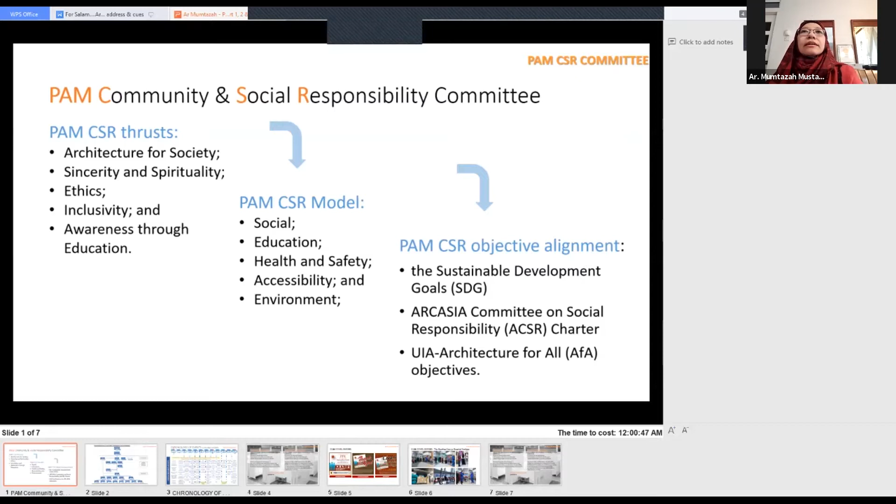So we actually studied, evaluated, researched, analyzed, and prepared reports of potential designs and buildings while receiving feedback from local and international organizations and communities. Next slide, please. We have designers who proposed designs of quarantine centers to the government, all within the first week of MCO. Next slide, please. This was last week's slide. So next one. Last week, as Architect Mustapha mentioned, we had 3 designers present their ideas, and we even had 1 volunteer architect who was called by the government and actually participated in the setting up of a quarantine center in Sabah. Today we're going to have 3 more presenting their ideas. And also to answer last week's many questions, we have an engineer here too.

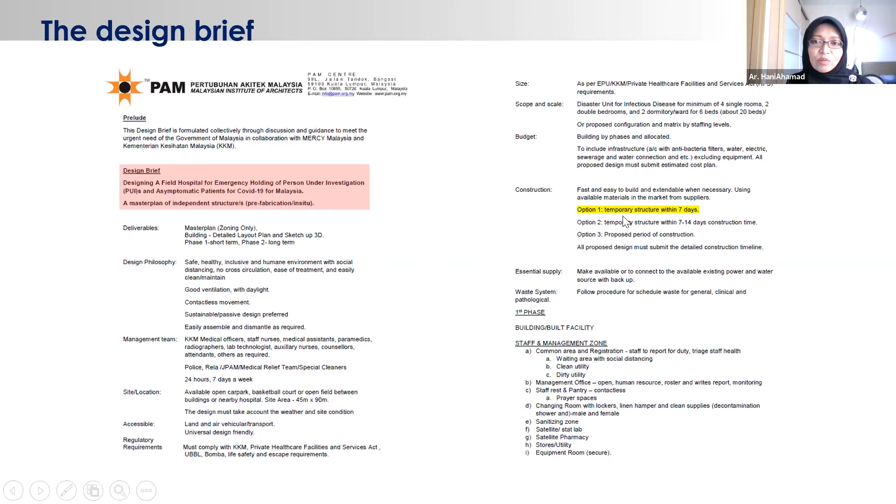So this exercise for the quarantine center is a joint venture between Mediconsult, PAM, Mercy, and several other architects as well. So this is my turn this week to explain our proposal. We received the design brief from PAM, which called for a field hospital as an emergency holding to house the person under investigation or PUI and asymptomatic patients for COVID-19. We actually selected option 1, which is to construct a temporary structure within 7 days.

We made our assumptions. We are looking into the patient profile in our design, which should be able to house only confirmed positive COVID-19 patients who have no symptoms or mild symptoms. There should be no pre-existing illness. There should be low risk as well. So that is on the patient side. And then in terms of design criteria, because we're looking into fast construction, it should be modular, scalable, easy to construct, and also functional at the same time.

At that point of time, when the proposal was asked, the government hospitals were still able to cater to COVID-19 positive patients. So this exercise is actually looking at the so-called emergency scenario in case there's a sudden surge in positive cases where the government hospital will not be able to cope any longer. So that's why we came up with the proposal, just in case there's a need to build the quarantine center or field hospital, so that this quarantine center can isolate those with, like I said before, mild symptoms. Then the hospital can concentrate and give treatment to more severe cases.

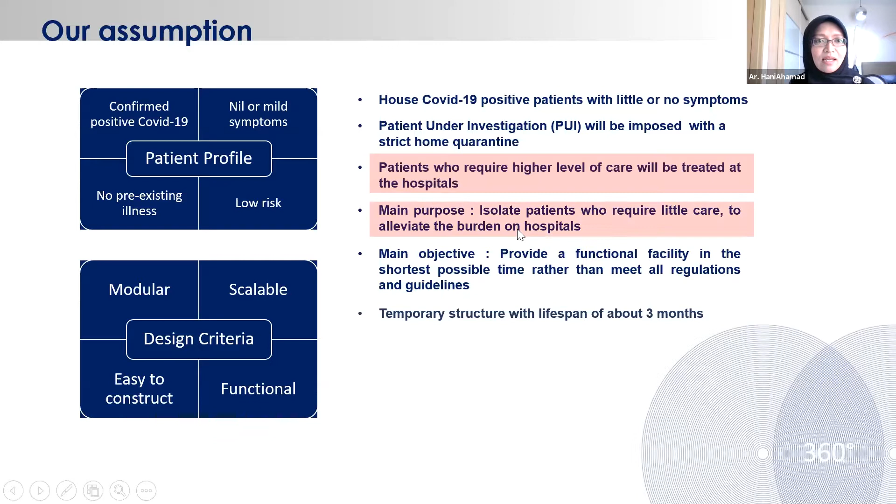Okay, we did a bit of research from the internet. Like isolation, there's a proper segregation between the staff, patient, dirty and clean. The same goes for this field hospital, just on a larger scale. We provide a proper transit or transfer zone. This is where most of the health screening will be conducted before the patient is actually sent into the patient zone. And then there's also dedicated staff quarters and a management zone as well.

We are not even actually addressing the PAM need statement, because we know that this quarantine center is supposed to be a support center to the government hospital. We are looking at just mild symptoms, but they are positive. So for our segregation of the space, we are looking at having a proper entry and exit, so that all patients and staff are properly screened upon entry.

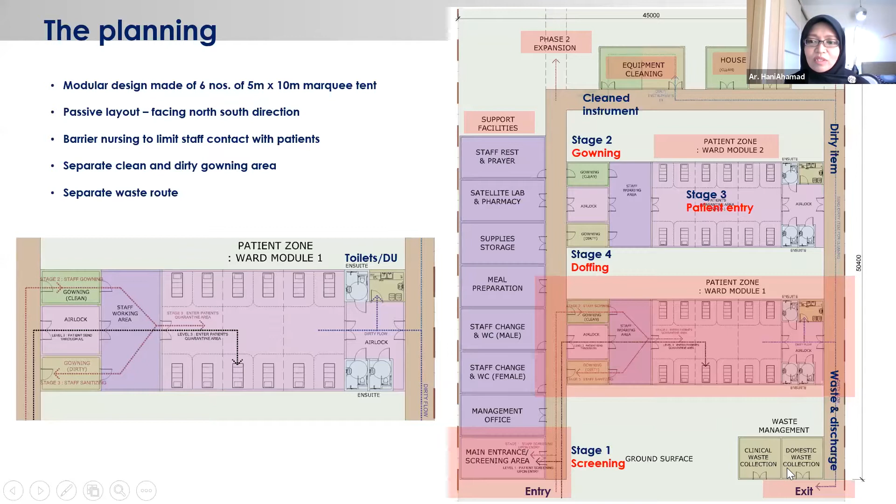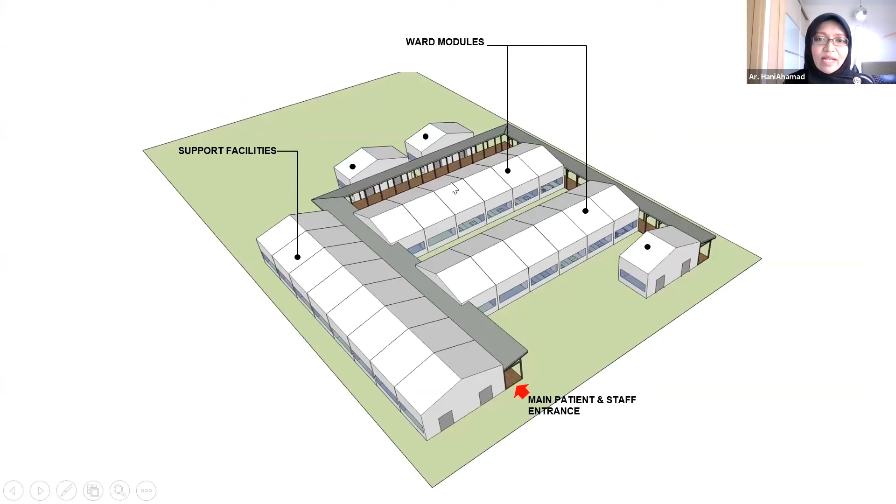So this is the massing, where you can see the main patient and staff entrance. There's the support facilities, the ward modules. You see, in this case, we only provide 2. And then equipment cleaning, housekeeping, and also the waste management and the waste collection near that.

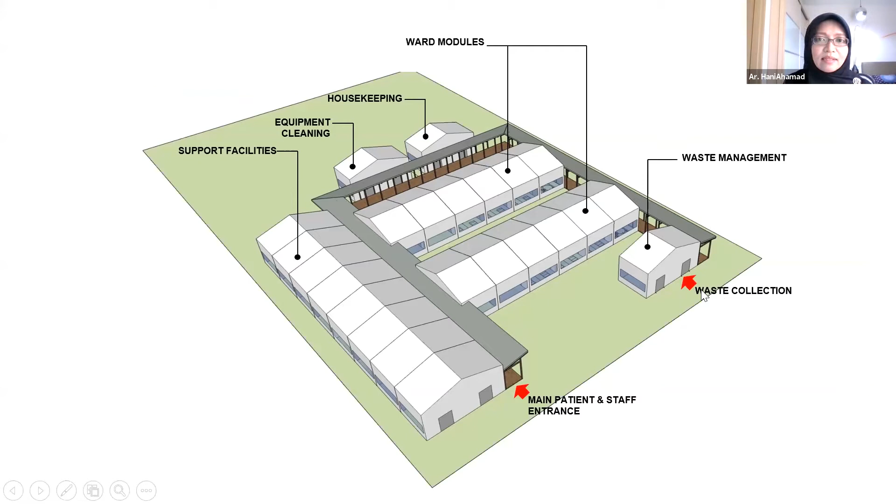Okay, immediately after that exercise, I noticed that WHO has introduced an online course related to COVID-19 issues. So they introduced this severe acute respiratory infection treatment facility design in several languages. So it's not just limited to English. There are other languages as well, if not mistaken, like Mandarin, Spanish, Russian.

So everyone who is interested to know in detail how we are supposed to design this treatment center, you can just go online. And then after you complete these 3 modules, you would receive the confirmation of participation, like what I did on the 4th of April. So you can just go to openwho.org.

And then immediately after attending that course, I was tasked to look into retrofitting of the Stadium Negeri Kuala Terengganu. Unlike Ar. Chan, who managed to design and build one, I think I am more fortunate because I just designed it, but because things are still within control by MOH and our government hospital, there is no need to retrofit this stadium. The site is located in front of the COVID-19 admitting hospital, which is Kuala Terengganu Hospital.

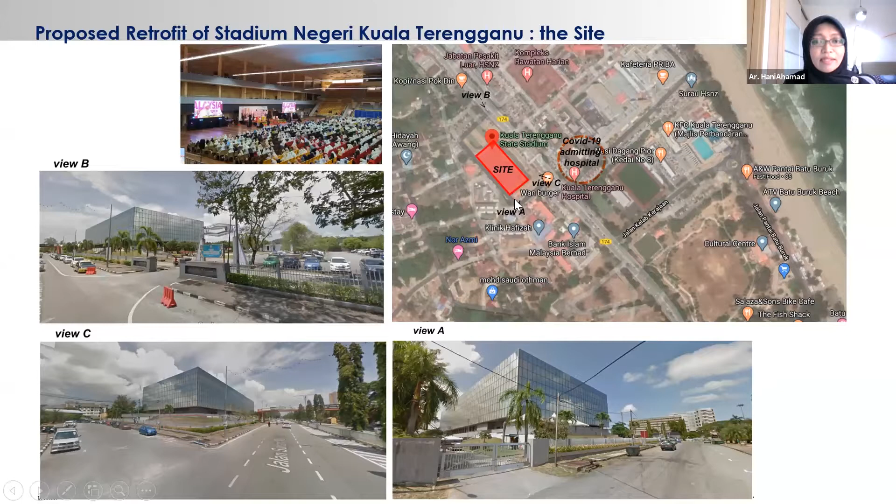Okay, this is my proposal. Just like what I mentioned before, a field hospital is an open space, so it's quite easy for you to arrange things in modules and in sequence. But doing the retrofit, you need to look into the existing space allocation, and how we are actually able to handle the ventilation issue at the same time.

So if you look into the planning, on the right side, the anjung is the main entrance to the stadium. It's slightly elevated, which is good as well, because this is where it's easy for you to control the entry. For this anjung, my approach is that I allow only the patient entry from this side, and also the clean linen delivery and the drug delivery. Staff and logistics will go through another entrance.

So that it's easy for the hospital staff, I presume, who should be stationed here to look after the patients. So upon entry, you can find a waiting area for the patients while waiting to be triaged and to have samples taken. Then before admission, they will go through the airlock.

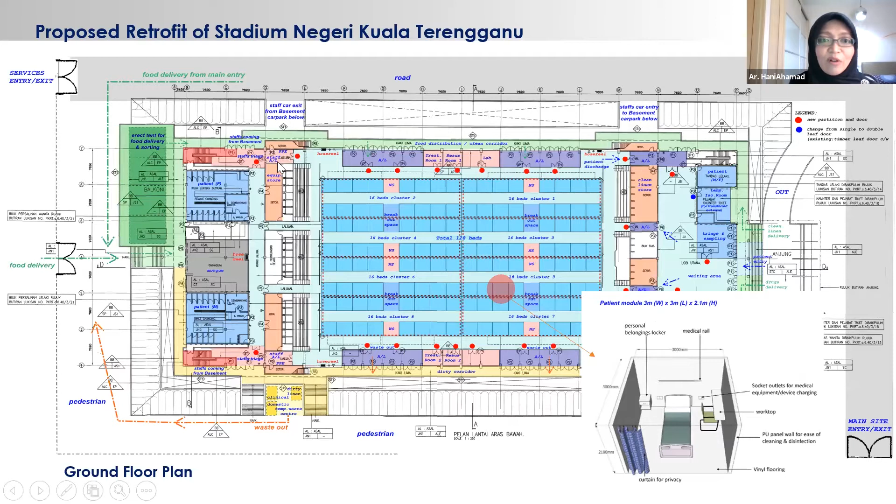This is the ground floor that I mentioned just now. If the stadium is retrofitted, the staff can park their cars, and the entry comes from the basement. They will go through these 3 staircases, walking up, and then they would reach this particular staircase, and there's a proper airlock, proper gowning and doffing area before they enter the patient treatment space.

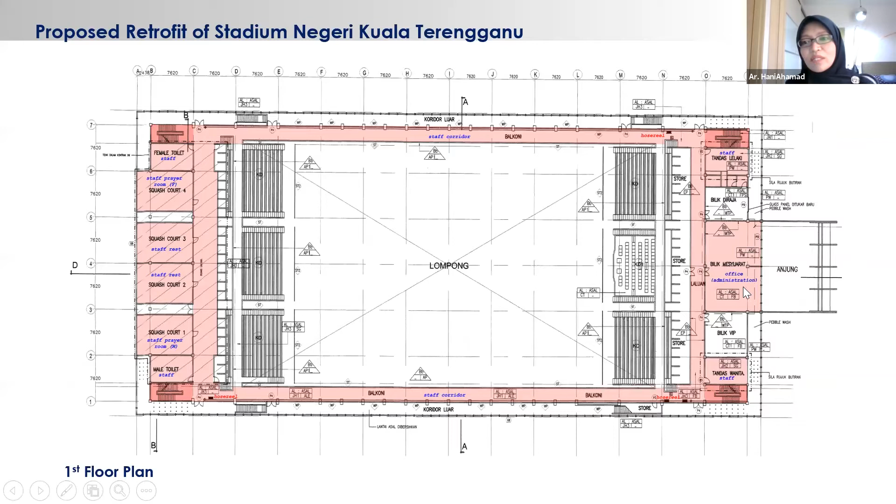At the same time, on the first floor, they have to use the internal staircase. They would go up to the squash court area that I proposed to be their staff rest and staff prayer area. There's also a male toilet, a female toilet, and a big meeting room, which can be transformed into the office administration as well. I think that's about it.

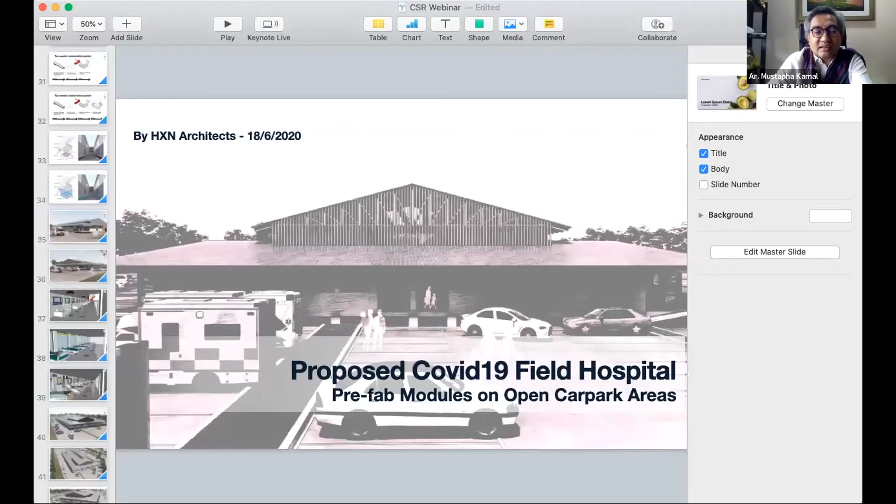Okay, Bismillah. Hold on, I need to time myself, yeah? Not more than 10 minutes. Okay, Bismillah, Assalamualaikum. Can you hear me? Okay, all right.

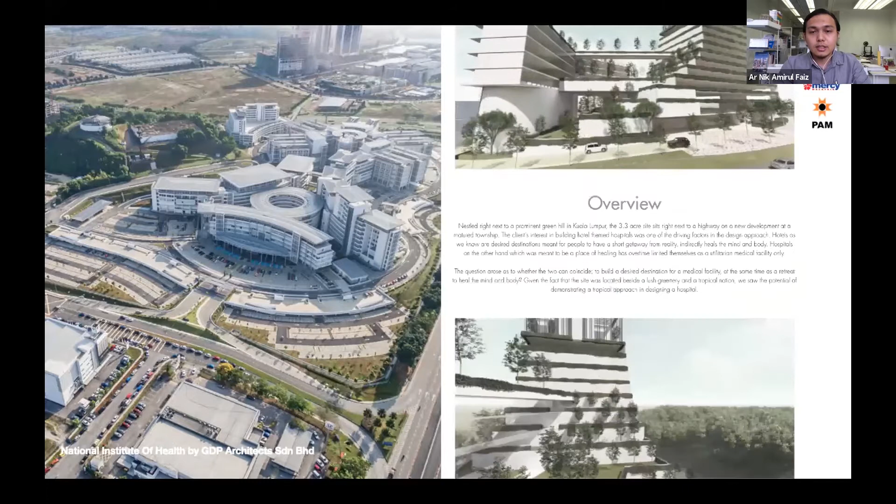We are a young firm, very eager and determined. We like to challenge conventions, with experience in commercial, residential and mixed development projects. A bit of background: my partner had direct experience in a health training facility project during his employment period. And we recently did a private hospital proposal at the end of last year.

So, jumping straight into the proposal, when we first received the brief on Sunday evening, we were told to come up with a proposal the next morning. It was a very unique circumstance. If we imagine an architect given a brief to design as running an 800-meter track, this was purely a 100-meter dash. There was no time to pause or relax, straight onto the drawing board. Regardless, we took time to digest the brief and straight away worked on a proposed solution.

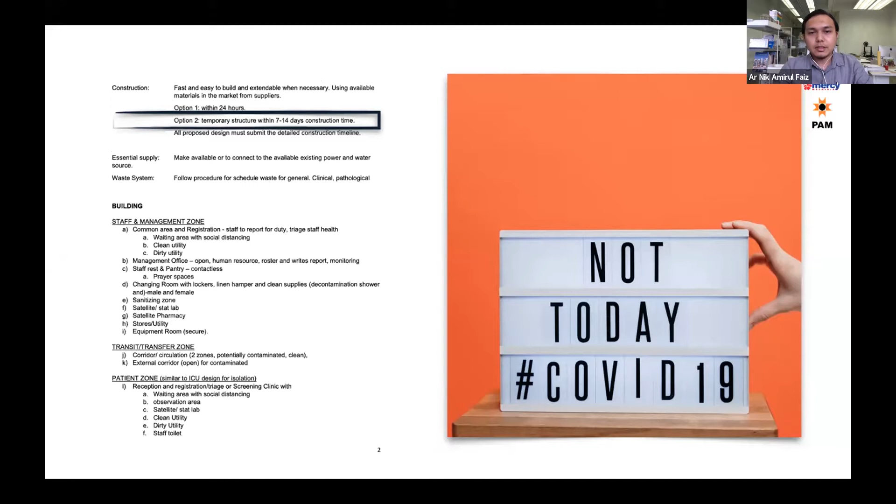We were given two options: one being within 24 hours, the other a 7 to 14 days construction period. We opted for the latter. The program and parameters were given, and the following was the outcome. Our first response was on the site selection. At that moment, the government hadn't announced the gazetted sites meant for the quarantine centers yet.

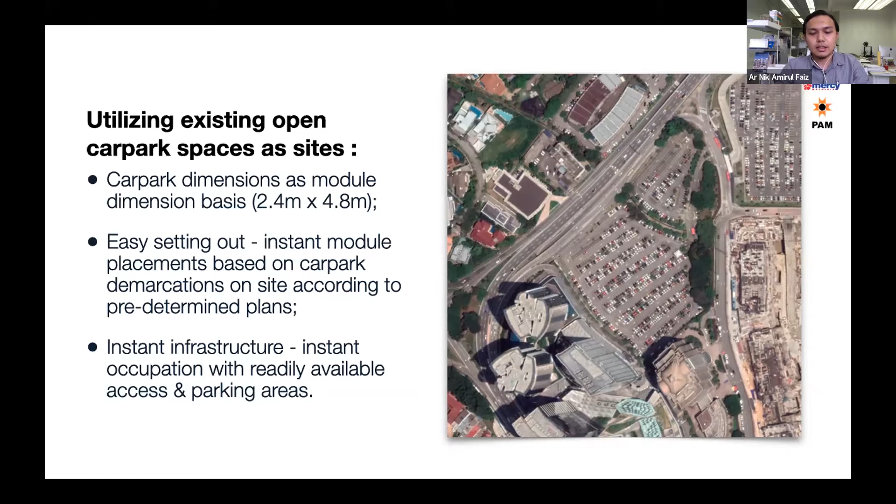So our response, therefore, was to occupy and build on the open car park areas. Very simple reason being that we wanted to use the car park as basis for modules for our designs, right? And easy setting out. So imagine if a team were to come and set up the hospital or the field hospital, it will be done instantly and very quickly, and also instant infrastructure, instant occupation with readily available access and parking areas.

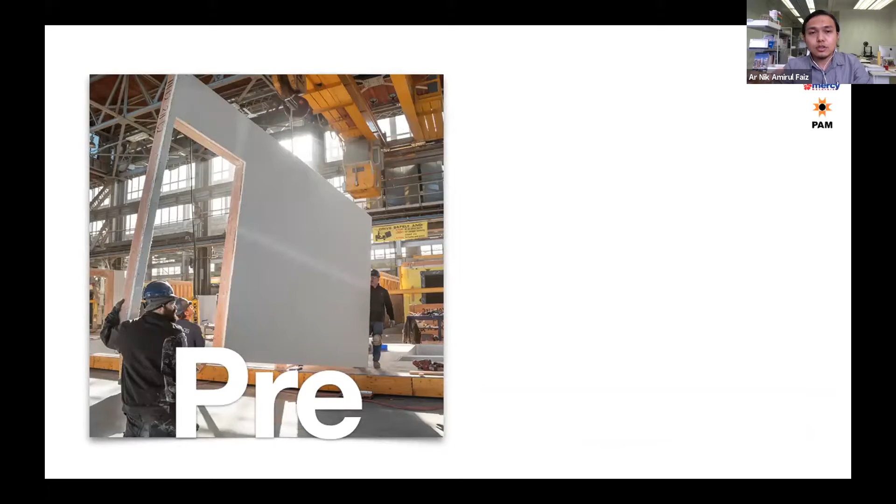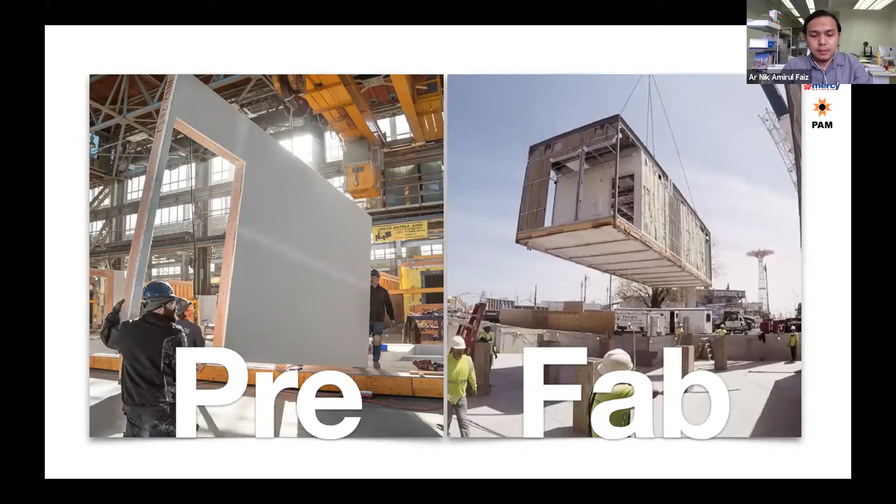So using the car park dimensions as our design basis, the next item was on our chosen method of construction. So nothing pretentious. We straight away adopted the prefabricated approach, right? So using the car park as module, we immediately use as basis for our design. So the prefabricated structures, adopting the block concept, prefabricated off-site and delivered on-site and assembled on-site as well.

So steel gypsum boards, GI windows, very simple steel framing, complete with gypsum floors and walls with windows ready. And then the concept is to raise the whole structure on precast concrete stumps for easy placements as well as services installation. And then a simple double deck roof so that we achieve insulation, external protection, as well as finishes all at once.

Okay. So a few days into the MCO, this movie went viral, as you all know. So me personally, I was very fortunate to watch it, I think the first few days. And the good thing is it gave us a very brief understanding of what we are facing at the moment. So it's like everything happened like clockwork, you know. Oh, this is happening. Oh, this was in the movie, blah, blah, blah.

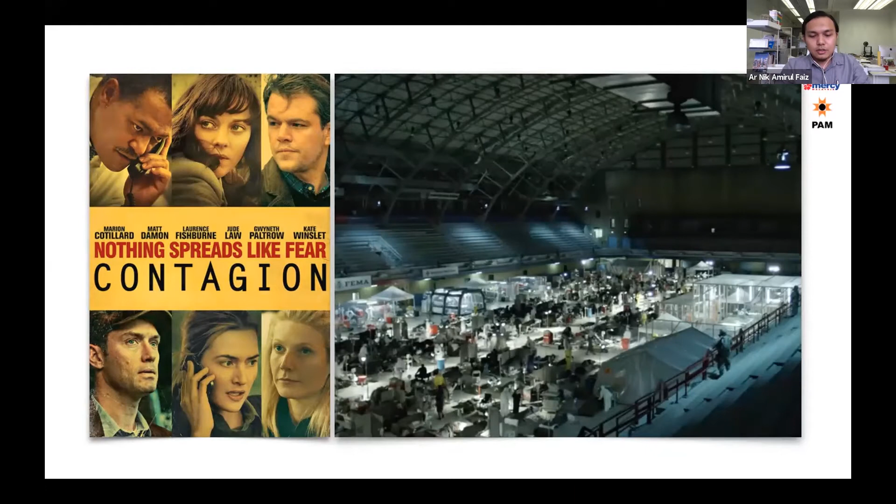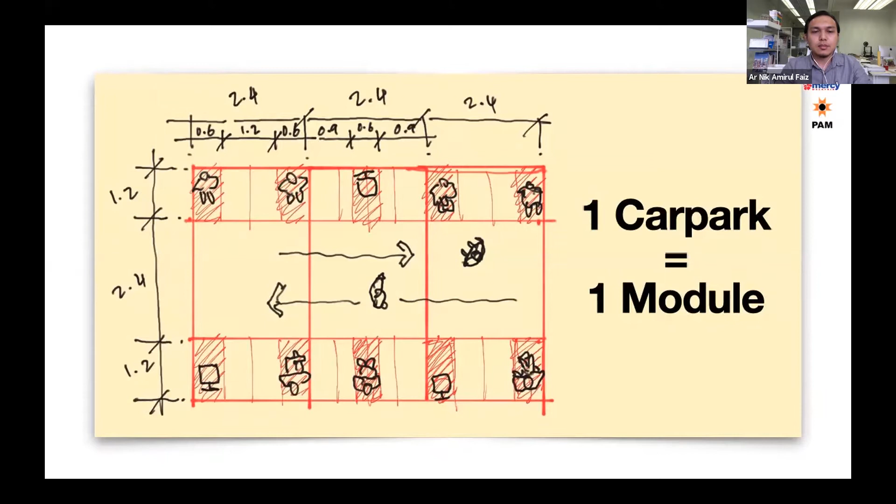All right. So that was our inspiration, and we actually took lessons from there, and we straight away wanted to focus on two issues, which was mainly containment as well as our new norm, social distancing. So after all the research was done, we straight away went to the drawing board. So our focus was to have a clear layering of spaces. So taking the car park as module, as you can see from the sketch, this was our main basis on social distancing approach towards the layout, at the same time in shaping the rooms and spaces onwards.

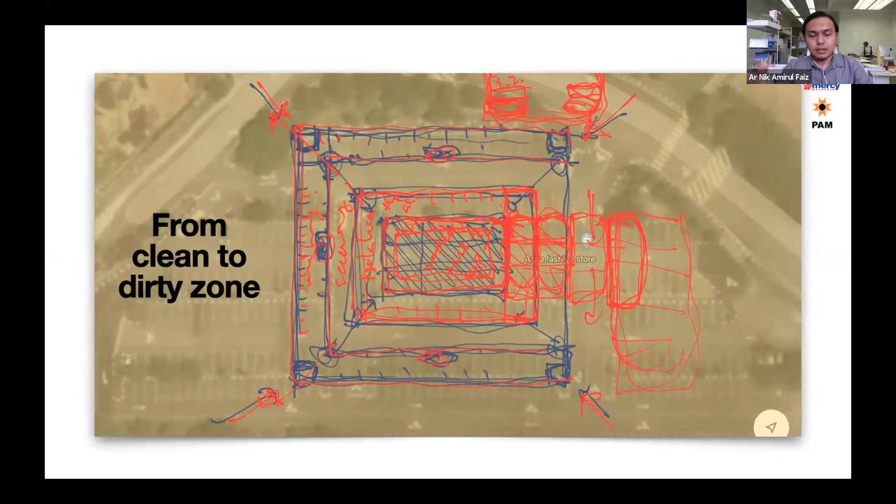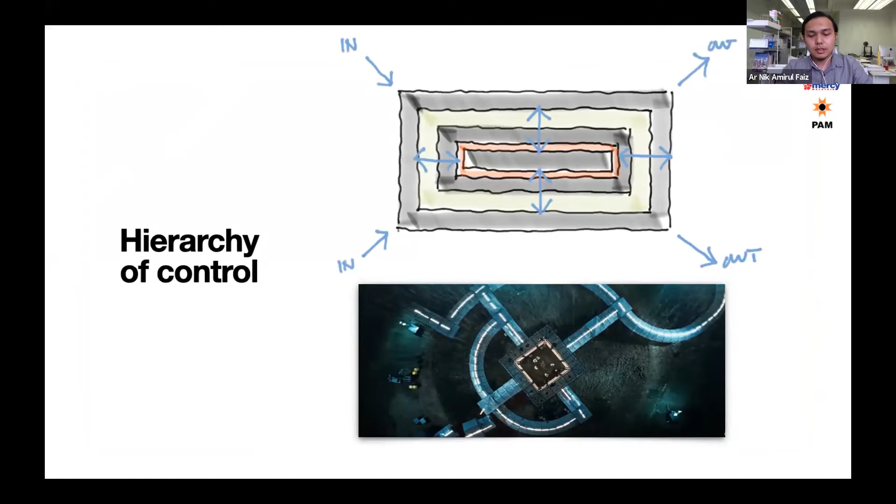So our focus was to have a clear layering of spaces between clean area moving to the dirty zone, all right? Also known as the containment area. So another important factor was the hierarchy of control, because you need to have screening and transferring from the clean to the dirty areas. All right. So also not forgetting the visual connectivity and wayfinding. So we introduced courtyards between the clean and dirty zone so that people will know and can navigate easily.

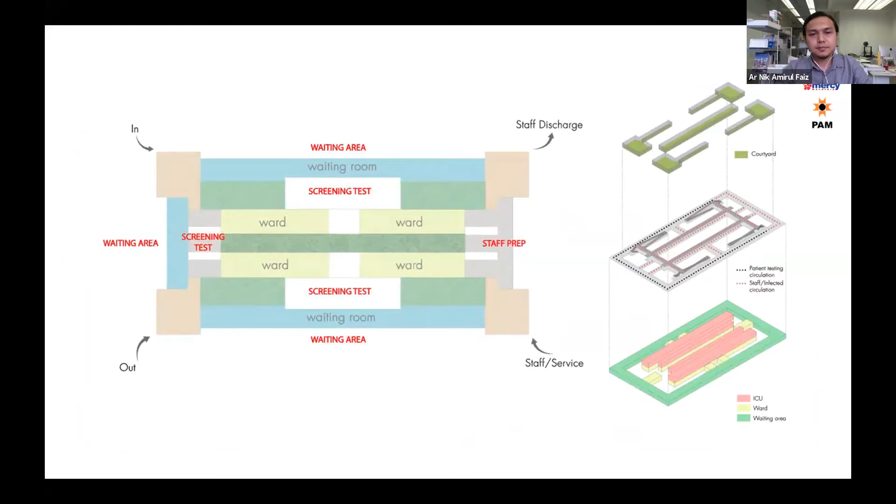So this is the outcome of our program, the diagrammatic approach. It's more like a pyramid concept moving from outwards inwards. So a brief walkthrough through the building. A public who comes, they will enter from each of the end corners there. And then they will move into the waiting zone. So waiting zone is designed such that it allows social distancing. So you need a very big space for that.

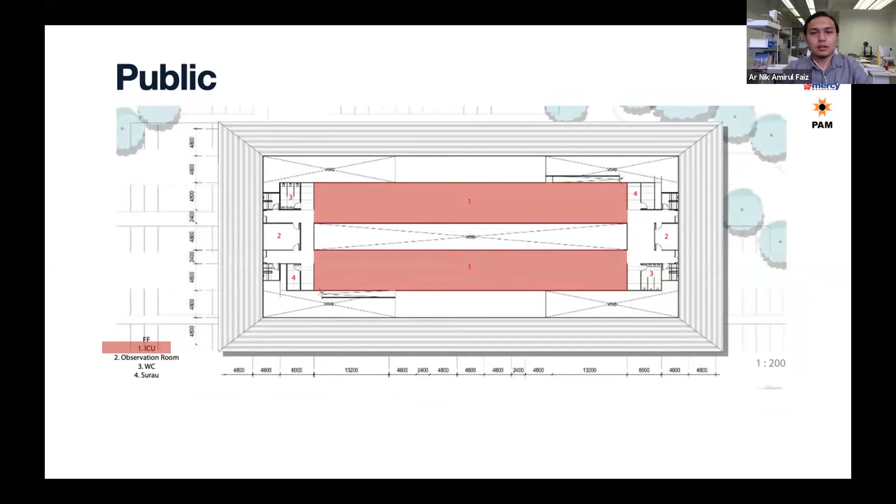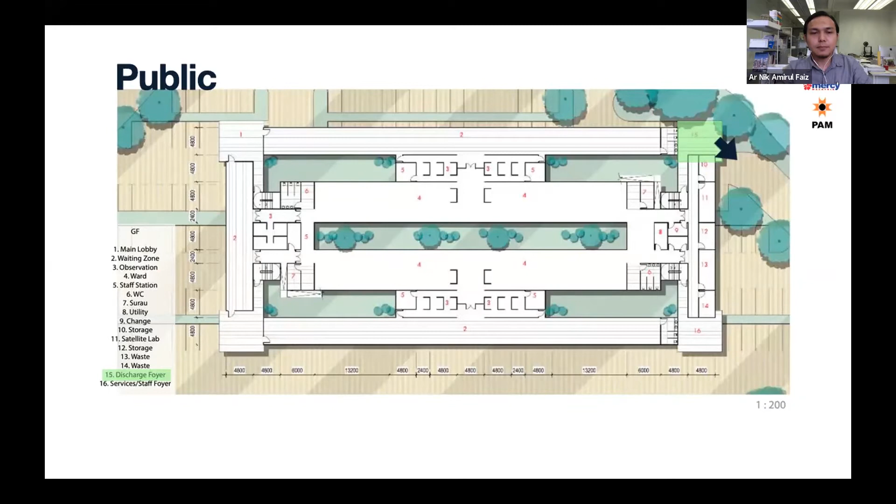Then they will move on to the screening area. So this is where all the airlocks and isolation spaces are placed. So those who are tested positive, they will move in to the central area, which is the contained area, the wards. And we also have allowed for possible ICU wards up on the upper level above. So if after one is already treated and they are able to be discharged, they will exit through that corner there. And this corner is meant for frontliners to enter and exit the premise, as well as ambulance drop-off area for positive patients.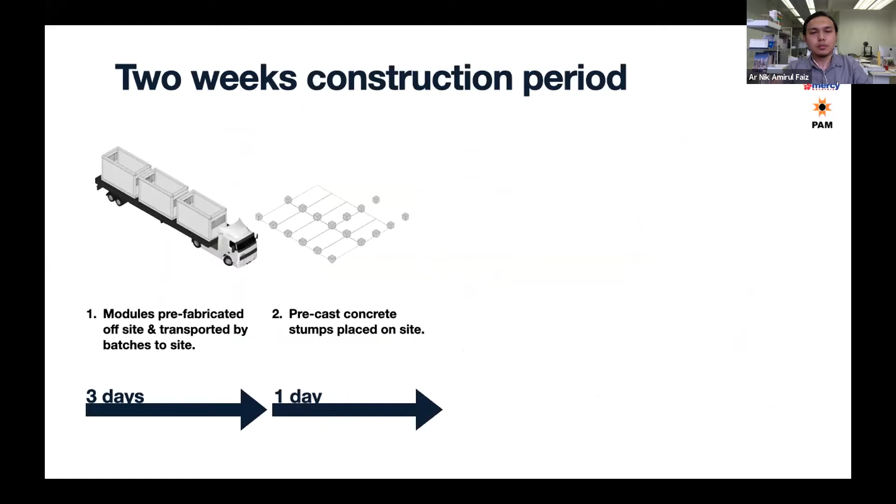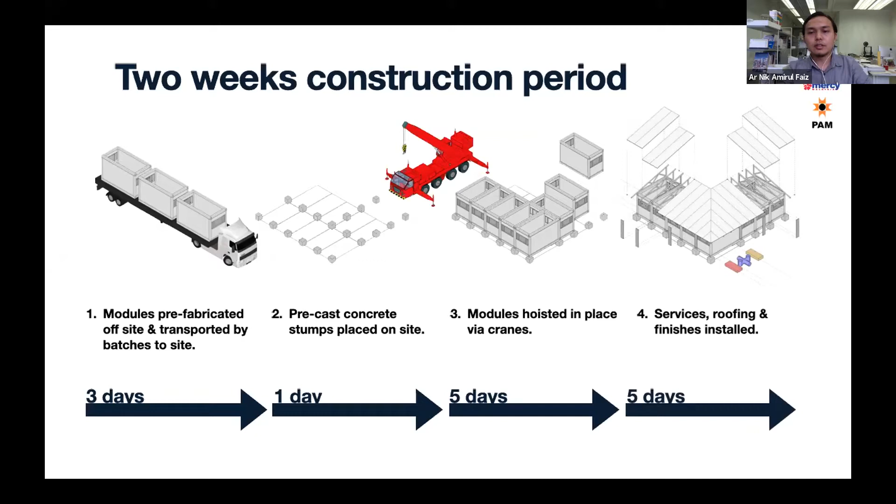Okay. So just the idea is that everything is constructed within the 2 weeks. So you have 3 days probably to fabricate it off-site. And then as it goes along, the concrete stumps can be placed on site, with the car park being as a setting out reference. And then modules are hoisted in place by cranes. That would take about 5 days, yeah. And then lastly, the services, roofing and finishes all installed. So this was our estimate. Of course, there's an overlapping of sequence.

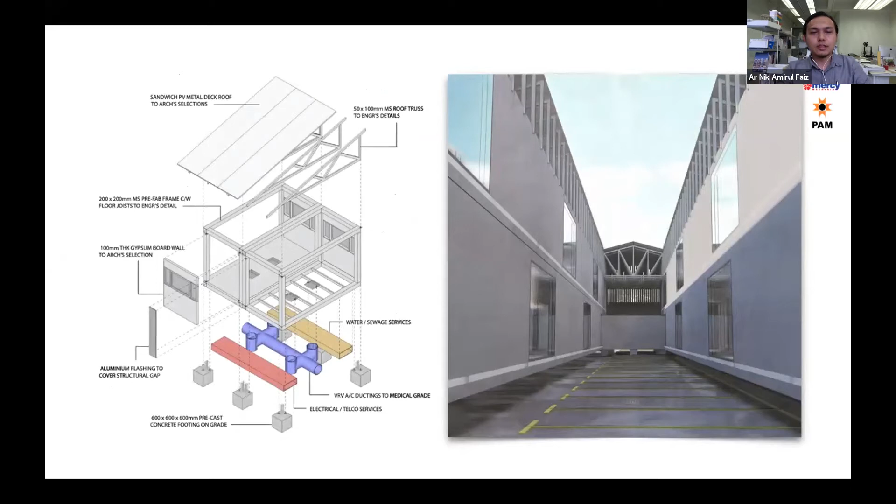This is a diagram to show our basic component that we felt was very important. So to raise it up, it allows for all the M&E services to flow underneath, all right?

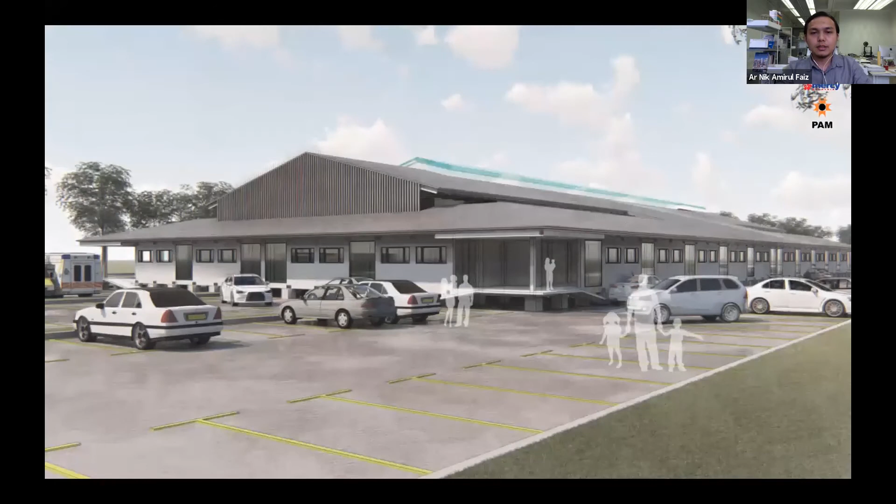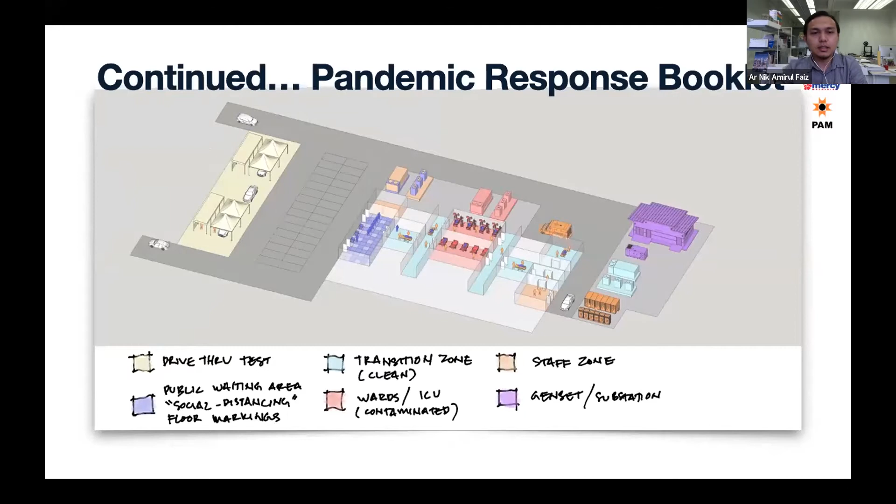So after this exercise, a group was created and we had a lot of discussion on board. I mooted the idea of having a booklet, some sort of a diagram document for possible pandemic responses in the future. So based on this COVID-19 experience, we documented the idea on the basis that we are occupying an existing facility. So you have to have the outdoor testing area, and then a little more diagram description of how the waiting area can use social distancing as a guide for layout planning.

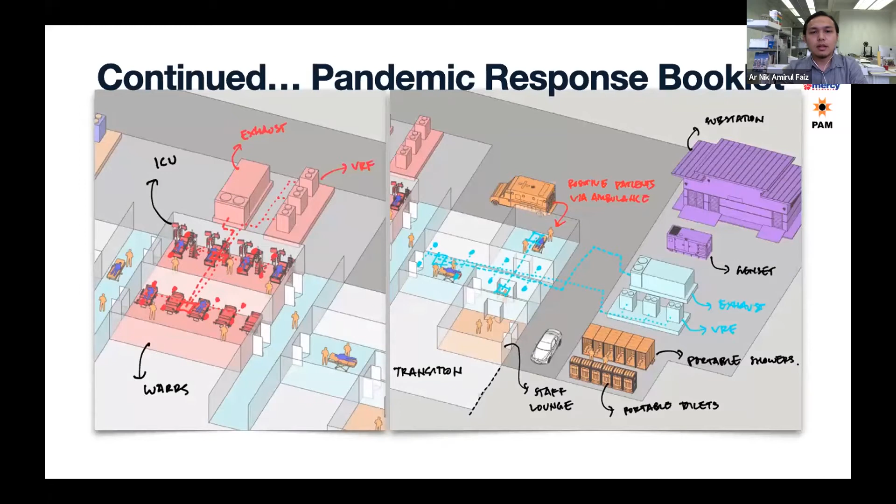And most importantly, all the M&E requirements need to be bite-sized, so that you can actually mobilize and occupy the premise instantly. And then some more diagrams showing how it will work.

Sorry, I just unmute. Thank you, Architect Mus. Hello, everybody. I hope you have enjoyed the first two speakers. Mine will be very, very brief.

So anyway, we did a very, very quick study, although it was like quite impossible digesting the design brief. There's so many things to do, zoning and all that. But this is our design philosophy. We understood all these words are so important, to have a clean zone and to stay healthy, and having the ventilation and daylight. And as Architect Nik mentioned, the social distancing is important.

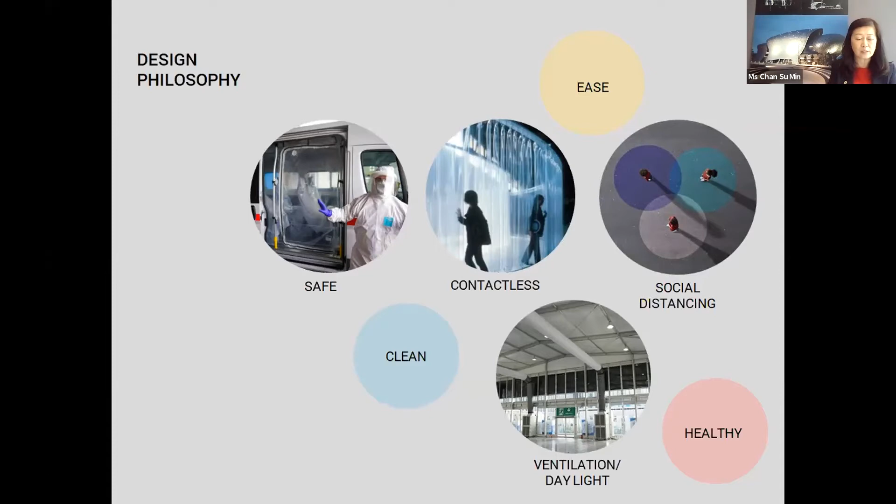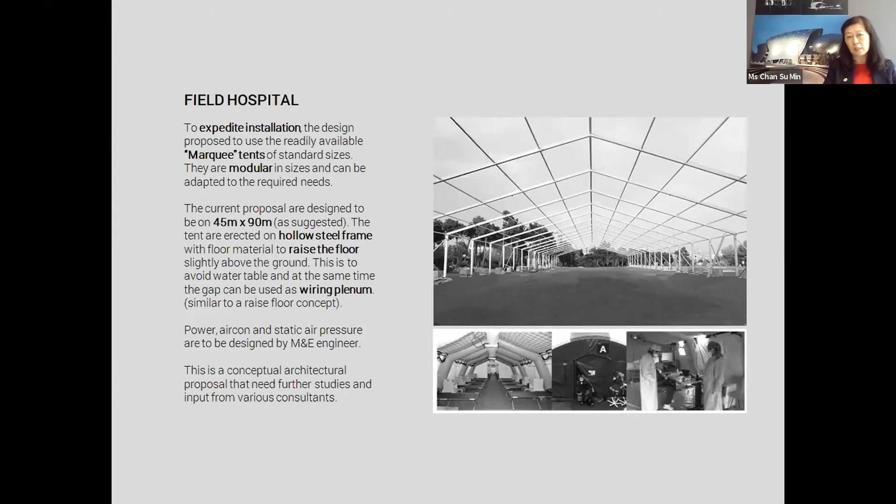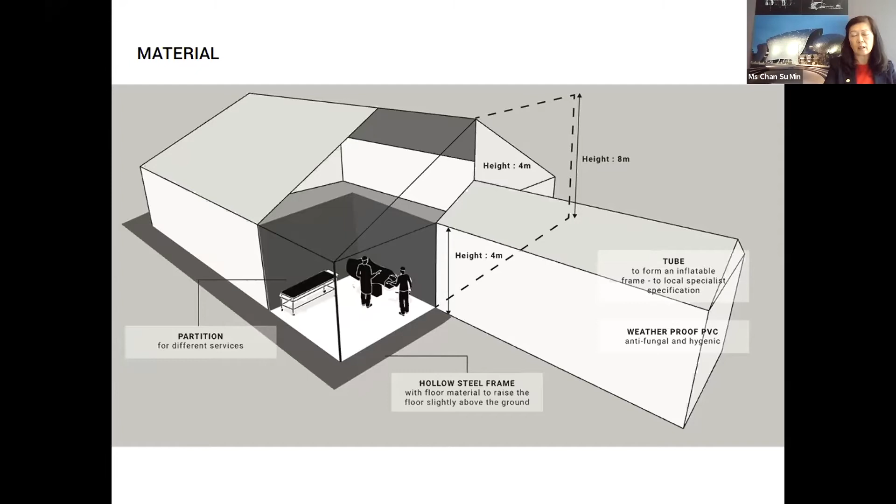So what we did was we chose a modular system, a little bit like a marquee that you can set up very quickly. This would be laid out on a site which is given to us, 45 meters by 90 meters. Our frame span would be 15 meters and it goes on every 6 to 7 meters. So the main thing we used was a hollow steel frame. Once we set that up, it could be laid with waterproof covering and providing transparent panels for daylight. Of course, in a tent like this, it will be a closed tent, so ventilation and aircon is much needed. We also proposed a raised floor, and this is where all the M&E will go through.

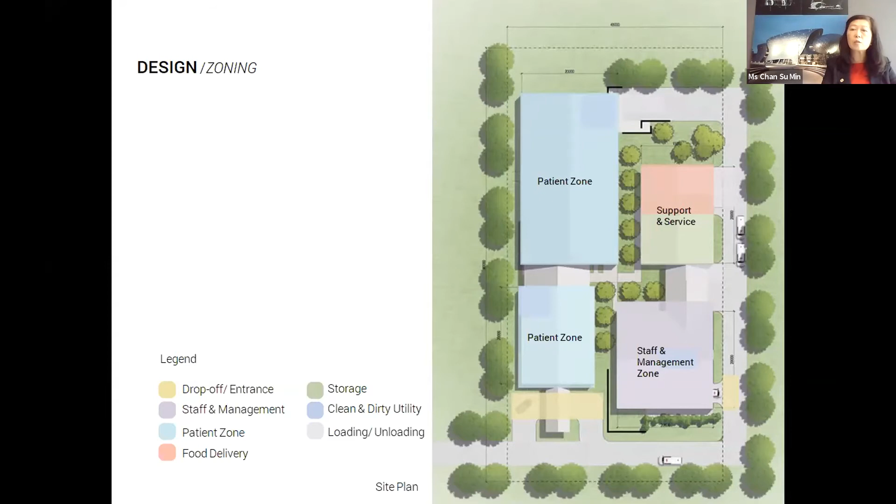So we went on to understand that this pop-up field hospital could happen in places like the open car park, the open field, basketball courts, and also in between buildings. So modules are very important. We studied the zoning, and this is more for patients who are already tested positive, hence this is like an isolation ward, a quarantine ward. So patients will arrive and go through their screening, lab tests, and if it is definitely positive, they will go into the ward itself. Of course, supporting sectors are needed: the staff and management zone, which is in a separate marquee, and also the supporting supplies, medical supplies, storage, and whatnot.

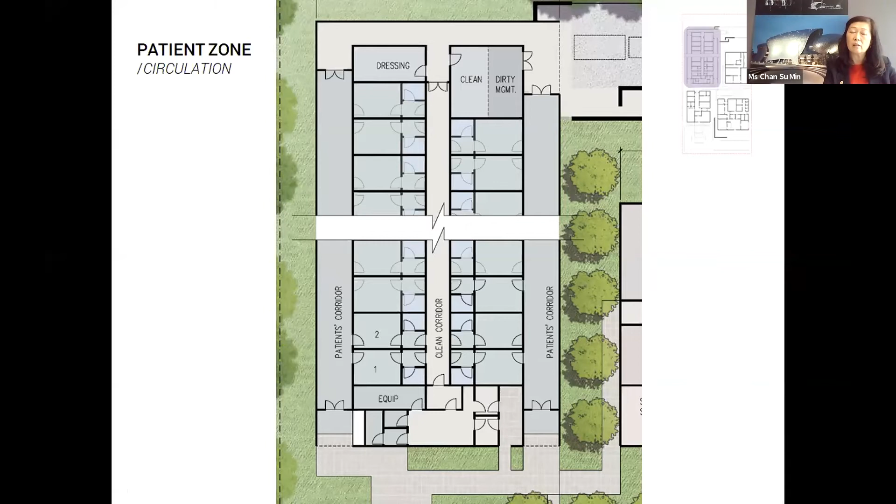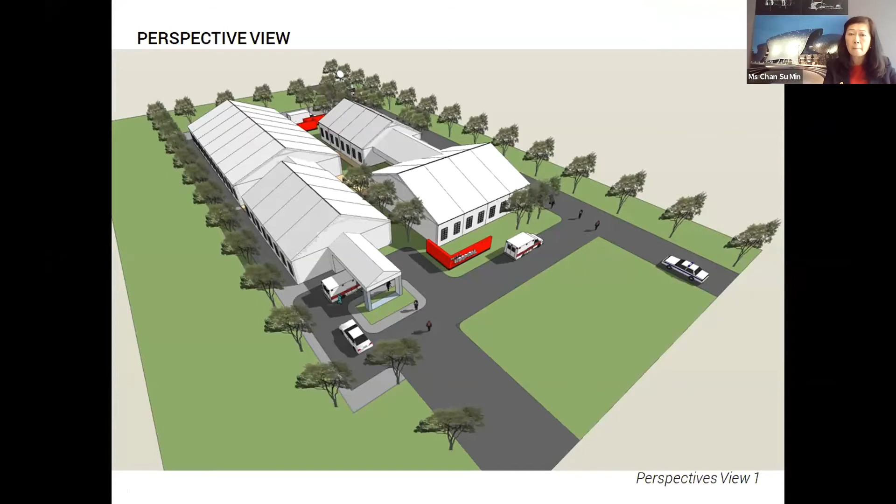And the inevitable also comes out from this, that some patients do not make it. We have an area at the back where the body can be disposed without coming to the front. Ideally, we hope that this will happen in all the sites that are given.

Now, I would like to share with you, while we went through the MCO, and this was only the first Sunday in the MCO, and news around the world wasn't good. I think you've all heard about the scary figures in Italy and Spain that went up. And I think our chat group was thinking on a bigger scale.

We can have all the pop-up field hospitals, but I think we have to be more prepared, more prepared if our cases go up. So we were looking at a larger building, an existing building as well, to refit and convert it into a temporary makeshift COVID-19 hospital.

What we have done is we looked at one of our buildings that we completed in November 2016. This is the MITEC Convention Center in Kuala Lumpur. I think you all would have seen it or been to an exhibition in there.

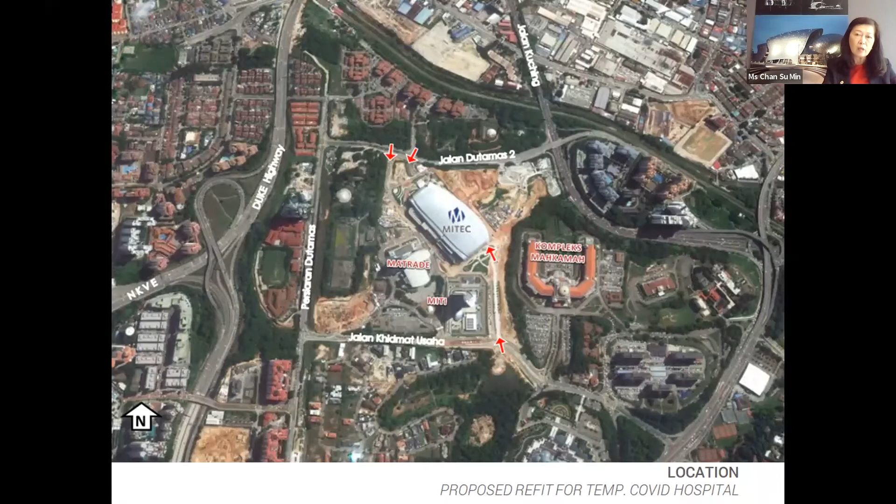We also have to have consent from MITI and MATRADE, who are the landowners and the building owner, before we could propose a refit to change this into a COVID hospital. This convention building has 97,000 square meters, just over 1 million square foot. And we were looking at just 2 floors of it.

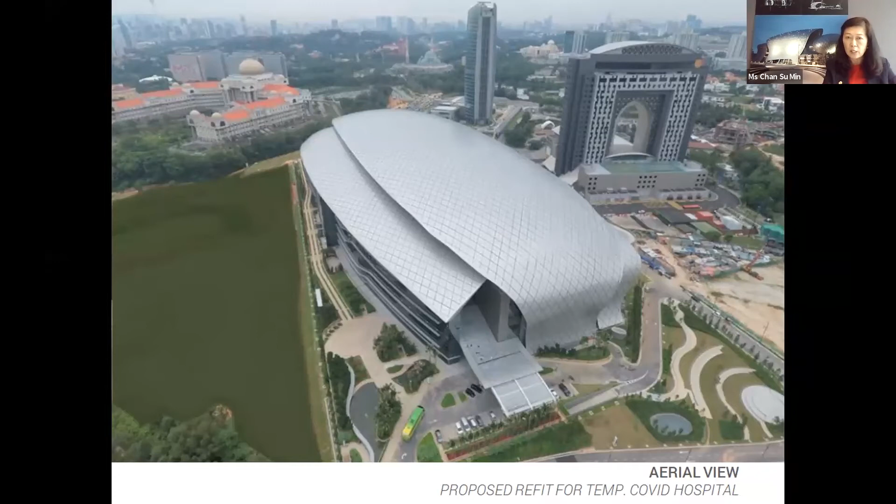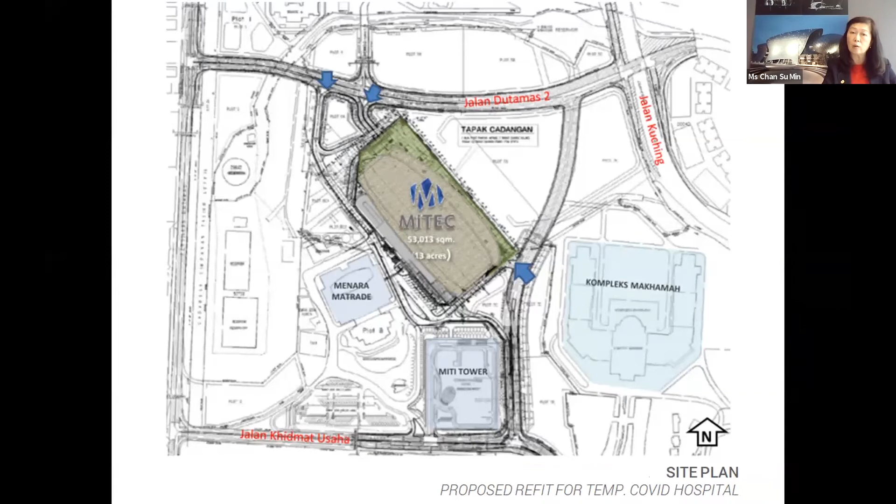So I will show you the access first. You can approach MITEC from 2 areas: from the front, the normal Jalan Dutamas Dua Road, and also there is a back lane, and also another through the MATRADE building.

What we are looking here is also to see how many beds we can fit into each hall, so that we can retrofit one hall at one time. And should there be a need to increase, if the numbers go up, we will look at the next hall and the next. Because the beauty is we are in an enclosure - night, day, rain, shine, work can continue.

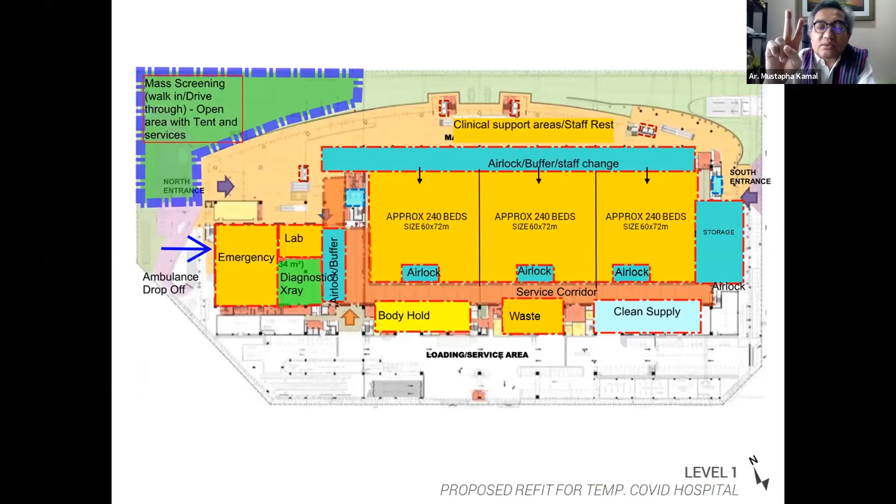There are 240 beds in one hall, so 3 halls give you 720 beds. The back corridor will be the one where the medical people will be using. And of course we have to identify where the body hold is, the waste for throwing away, and the clean supply and extra storage on the right-hand side.

Now, if I can just show you the ramp on the cursor at the bottom, that's where the ramp goes up like a U shape all the way up. I'm going to show you the next floor.

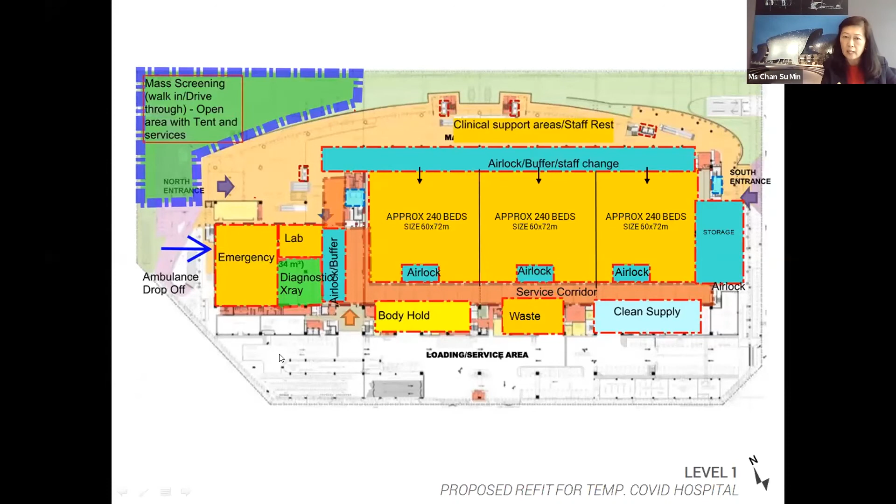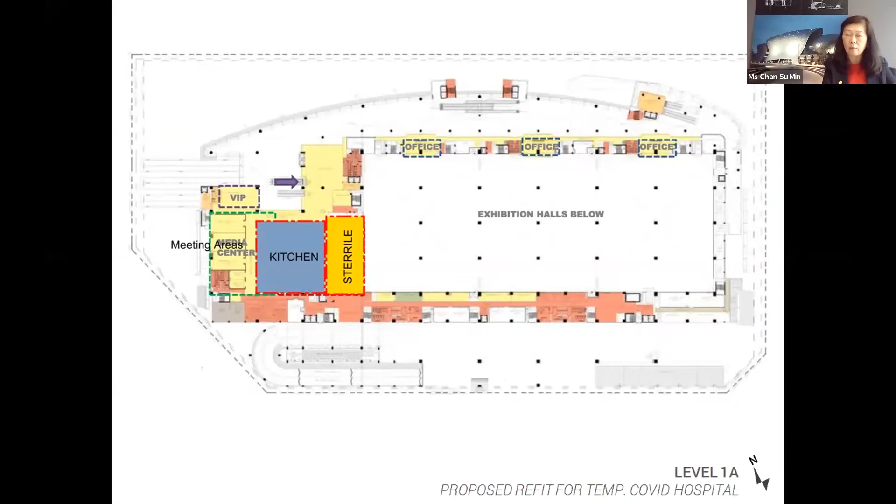We can also have a kitchen, and small offices can be converted into medical areas where staff need to rest. On another floor, level 2, we will have another 720 beds if needed.

To the left-hand side of this level, we think we can put in ICU, if it is a requirement, for maybe 60 to 80 beds, because they need a little bit more space.

So in totality, for two levels of the MITEC building, we could fit in about 1,500 beds. But while we were thinking of all this, we didn't want this to happen. This is one way we can be prepared if our country really falls into that situation. I was very glad to do this with the team.

Just some pictures now to show you before we end. These are the sizes of the hall. This one is actually right at the top where it is column free. These are the bed layouts that we fit in, a 3x3 module.

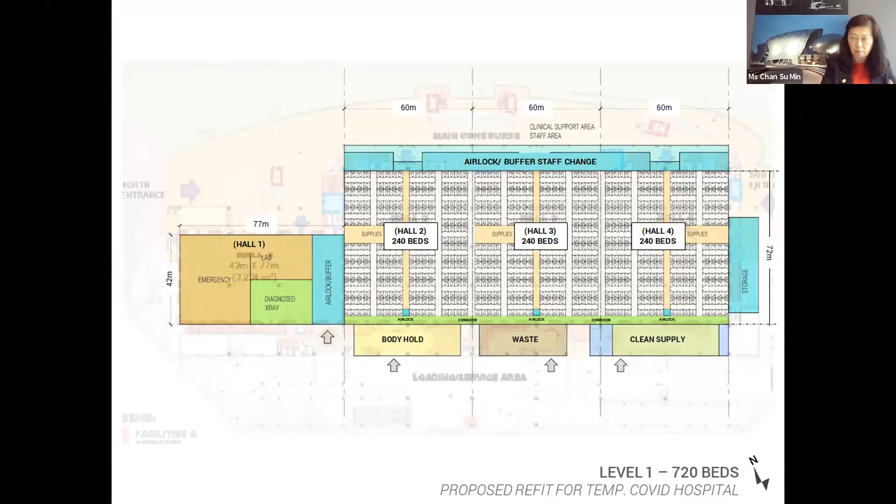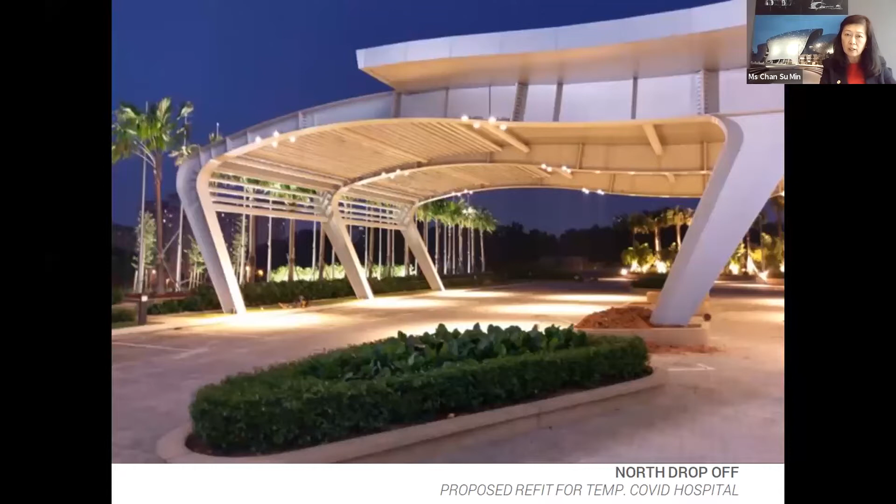I need to tell you there's a very big drop off at the front. So this is another covered drop off, which is very useful for heavy admissions. And lastly, this is where the delivery and unloading happens on every floor. This is as vast an area as we can have it.

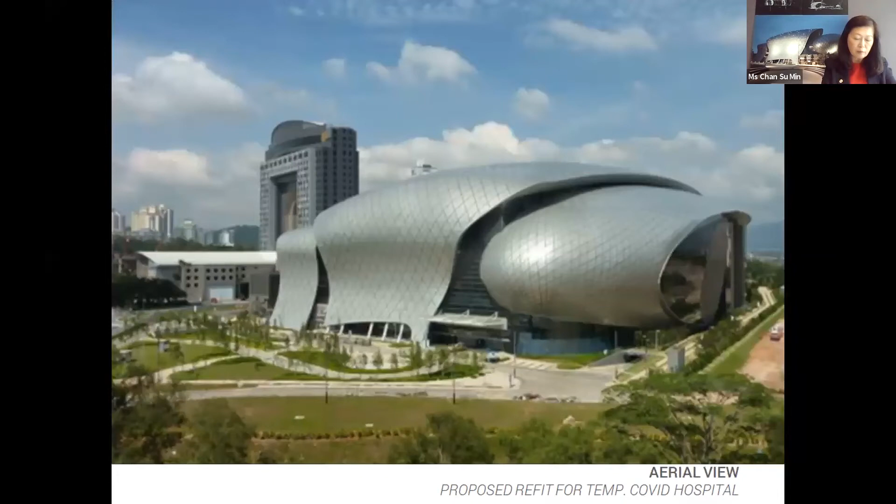So thank you very much for hearing me out. I just want to leave you with one last word: for a pandemic of this size, which is so global now, time is really the essence. We got to move fast.

Thank you very much, Su Min. That was very good to show two projects in one go. Okay, before we go to the next speaker, last week there were lots of queries and also misunderstanding about provision of ventilation into quarantine and isolation centers. So we are very fortunate to have here with us mechanical electrical engineer Yip Fook Keong, who was tasked to make sense of all the viable ventilation systems for new as well as existing buildings. So we'll now continue to the next presenter, Engineer Yip, Managing Director of Purudin Contracts Sdn Bhd.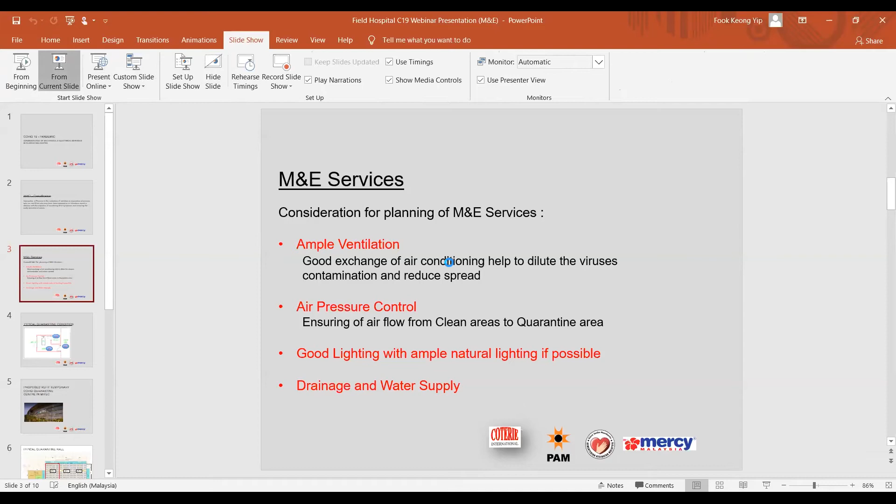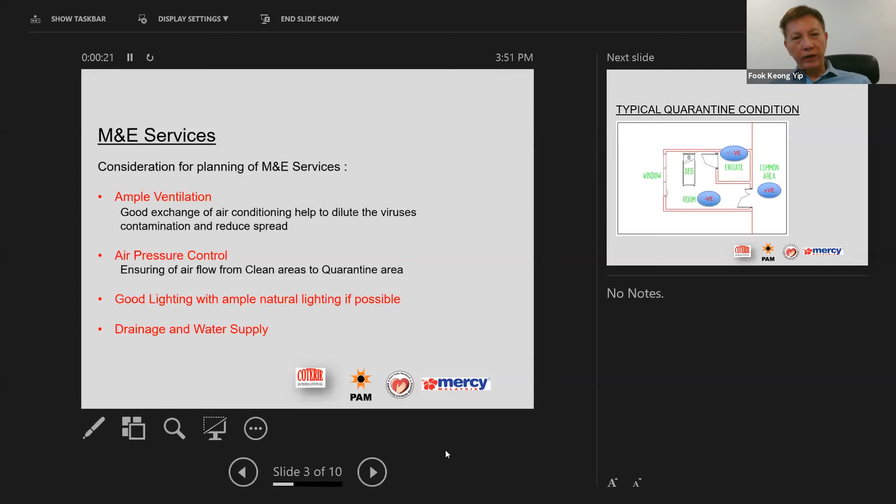So in terms of drainage, water supply and electrical supply, it is one of the factors that have to be considered, because you need clinical sinks, you need water, you need drainage, as well as power for the lighting to convert it to bed ward areas that need to be zoned.

Okay, this is a typical quarantine condition of a room. The best, of course, is to have individual persons quarantined in individual rooms, but sometimes it's impossible to do that. But if you can have it like a hotel room that is being converted, it's always best to have the room as negative pressure, the corridor as positive pressure, and the toilet or ensuite as more negative pressure. So the flow will be from here to here.

So converting a hotel guest room to quarantine is, I would say, the best ideal place to be converted. It's easier to convert, because if you turn on the ventilation here, it will be forever negative, and the air will be flowing here. And the aircon in this unit is standalone for the room, so it won't be recirculating throughout the whole space. So basically, your negative pressure will be contained within here and sucked up from the toilet. So it is well contained in the hotel room concept.

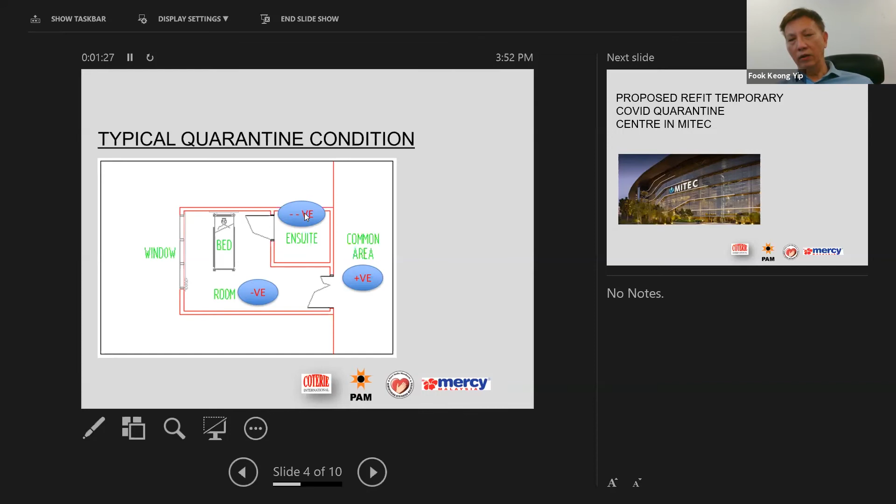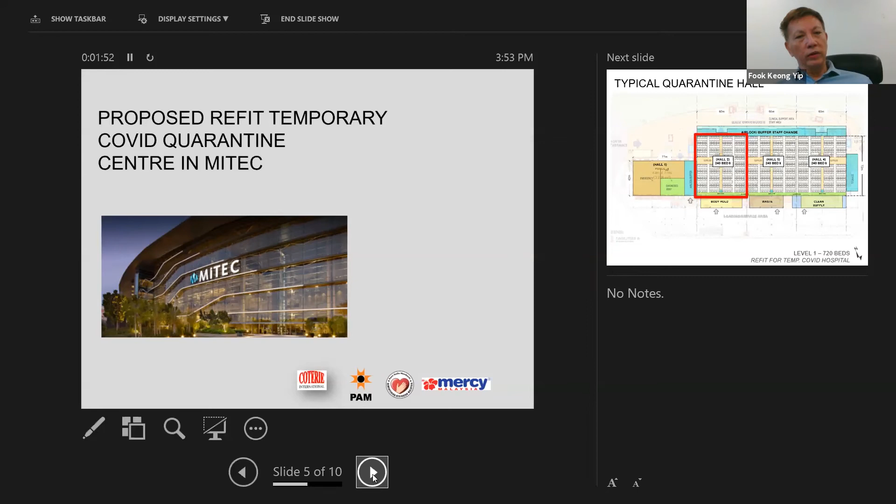So I will share my experience on how to retrofit the temporary COVID quarantine center in the MITEC building, which my fellow Ms. Sumin presented earlier. We are fortunate to have worked with ISP Architect on this project. We were the M&E consultant on this project as well. So without further ado, let me go to the first slide, which we borrowed from ISP Architect.

So with the zoning, it is fortunate that the halls are basically, I would say, partitioned off from the other areas. So it's quite easy to contain the quarantine patients within this zone and maintain the other outer zone as a clean zone. So with this, the M&E services are also centered on a zone by zone basis. So we have M&E services for this zone, M&E services for this zone. So it can be controlled and monitored easily.

Okay, this is a brief outline of what is being provided in the exhibition hall. In the exhibition hall, basically, it's one of the modules of the hall. There are underground trenches inside the hall. These trenches are provided with M&E services. The M&E services provided inside here are drainage points, water points, electrical outlet points,

and ICT points. So these trench covers can be easily taken out, and then you can just plug in any services that you want into the service trench. So basically, when you set up any beds or any quarantine center around here, your supply is all readily available. So that will minimize the so-called retrofit work to the M&E.

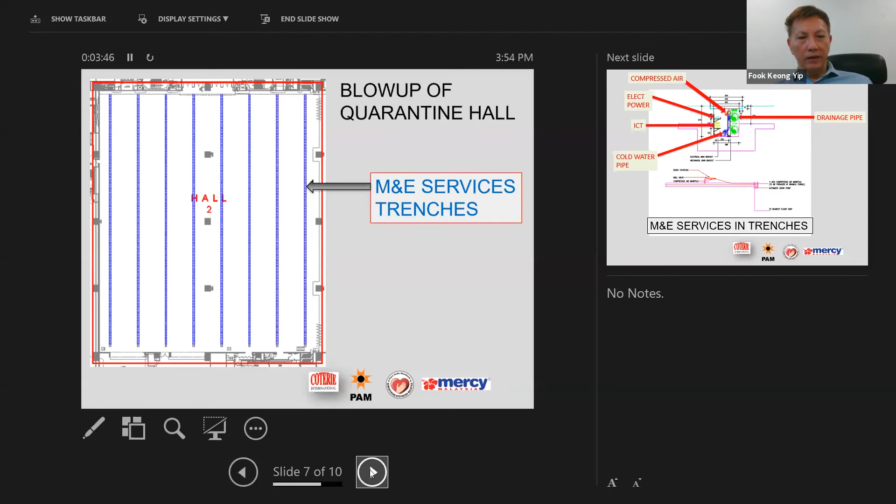So basically, what I show here is a typical trench detail that we have provided inside the exhibition hall. So on this modular trench we have compressed air, electrical power, ICT, cold water, and drainage. So any equipment that requires these services can easily be plugged in on a modular basis.

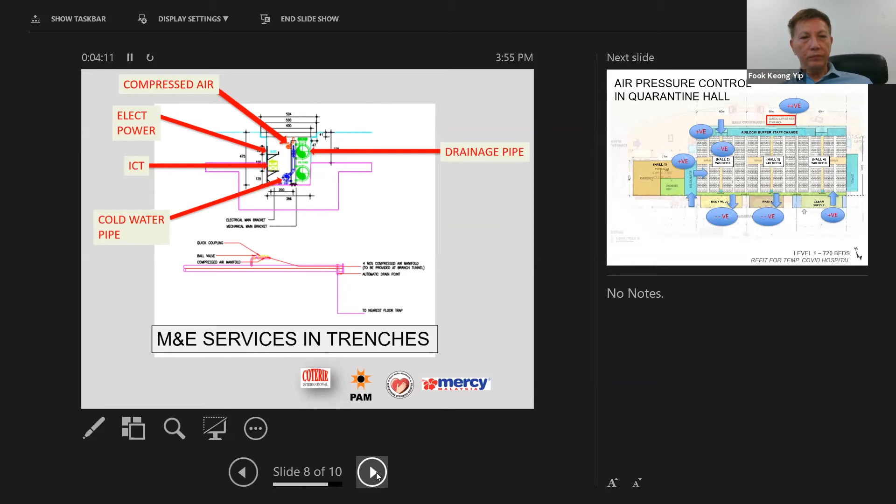So the next thing is how to convert the hall into a quarantine center. The hall basically is where we house the patients who are under quarantine. So this area where they are housed should be in negative pressure mode. And like I say, the outside will be in positive mode. And the body hold should be in an even more negative mode, because we don't want air from the body hold to go back into the quarantine area.

And the waste area, of course, will also be under more negative mode as well. And the clean area, of course, will be in a positive mode of airflow. So the condition is that you must always go from clean to dirty. The cleaner it is, the more positive pressure you should have on the airflow.

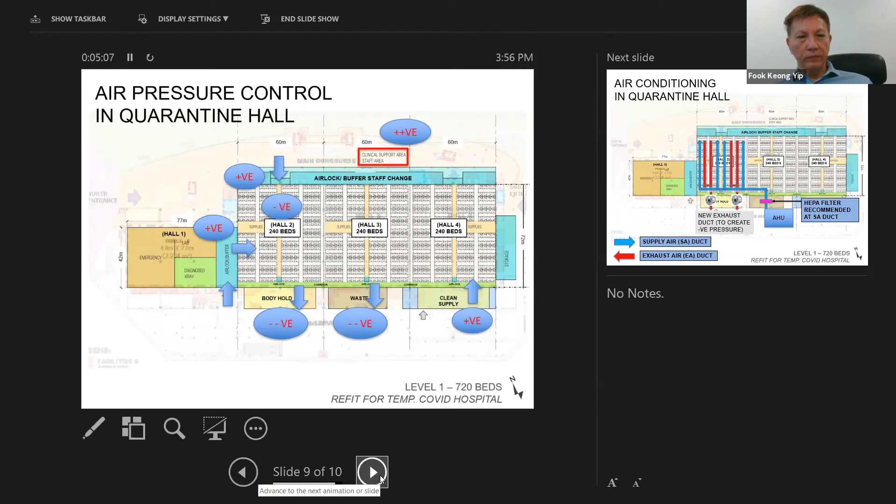Okay, the next slide I'll share here is a typical air conditioning that we have for the modular exhibition hall. We have AHUs on the upper part of the hall, where the blue line is the air conditioning duct. So they will supply into all the modular halls through a few AHUs around here. So this basically is a recirculating system.

Like I say, a quarantine center doesn't have to be a 100% isolation ward where you need 100% air in and you exhaust 100% out. So that is not a requirement in a quarantine center. As long as the social distancing between patients is maintained, 2 meters apart, I think that is good enough. So the air conditioning can still be

used in this sense. And to create a negative pressure here, we would suggest to put some ventilation exhaust ducts near the patient area where we can extract some of the air out from the patient area directly, so as to minimize contamination to the other areas.

So when you have air being extracted out, you create a negative pressure over here, over this lobby, and where this outside here is a clean area, air will then be transferred over to the infected or so-called dirty area. And that is our concept.

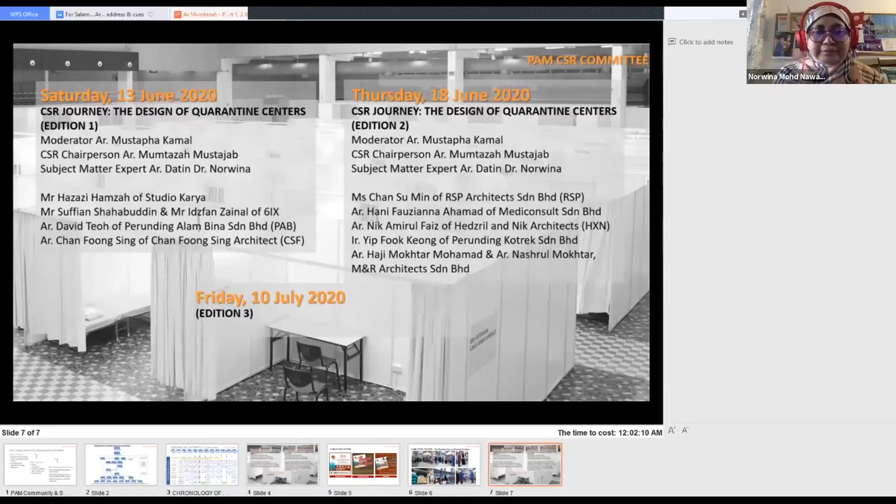Yeah, I think my task now is just to give very succinct definitions, more towards designers, because you heard throughout the first and the second session words about quarantine and isolation being sort of interchangeable, and also how it affects design. So this is from one of the literature reviews about what is isolation and quarantine. This is taken from the Institute of Medicine, where they were doing more on SARS at that time.

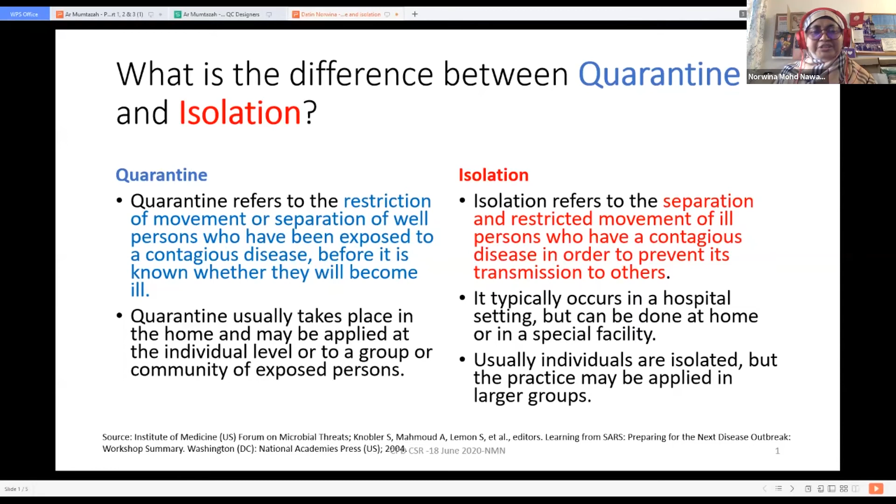But isolation refers to separation, restricted movement of ill persons who are contagious. But maybe here you're still not sure. So let's go to the next slide. Okay. Next slide, please. All right, I can see this now, more visual.

Again, this is from the Ministry of Health. The first slide is talking about generic, but here we are in Malaysia, so we always refer to the Ministry of Health guideline. You can get the guideline from the Ministry of Health website.

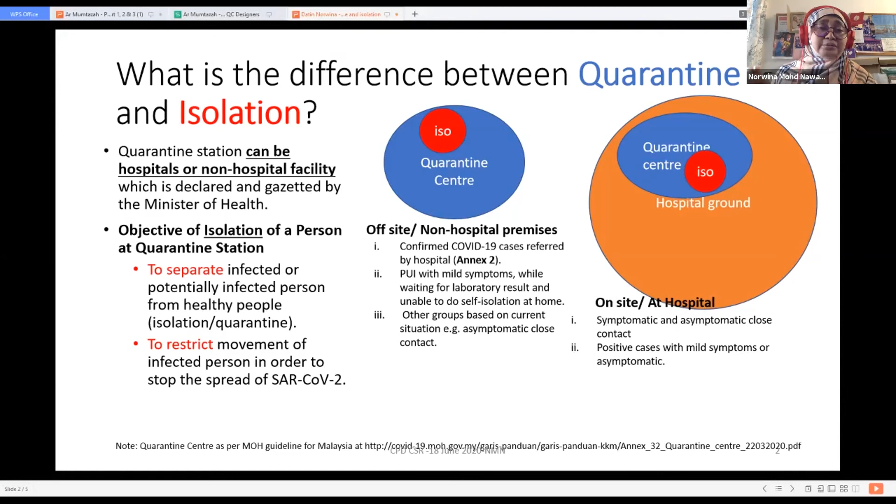So it says quarantine can be in hospital or can be in a non-hospital facility, so on-site or off-site. And it talks about the purpose of this quarantine is to separate and to restrict, just like what was defined. But it further defines what is happening off-site and what is happening on-site in terms of who are the patients being referred to. I think most of the speakers earlier talked about if the patient goes into severity of the condition, they will be transferred to the hospital where they have ICUs and a higher level of care.

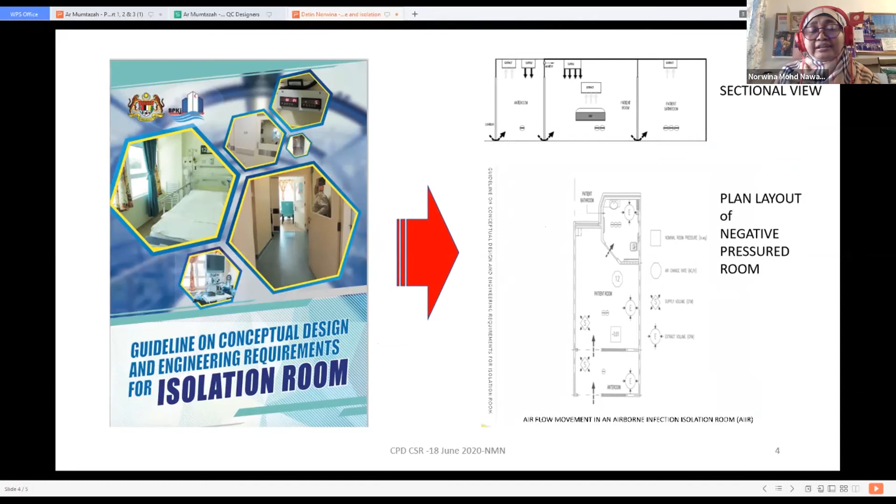Okay, just the next slide. Yeah, here you can get this also from the Ministry of Health website about what isolation is, and Engineer Yip also explained the flow of air that is coming in. So you have two types: positive, but here it's about negative. So you can see basically how it's laid out within the space. And you can get this also downloaded from the ministry website. Next slide, please.

Okay, this is the last slide. This is about references. You can get so many references. We managed to get them from the guidelines from China, from India, and as Architect Hani talked about, the WHO, where you can actually get your certificate online. So the last picture here talks a bit about the design of an epidemic center and understanding the zoning and the phases. I think that's it. Thank you very much.

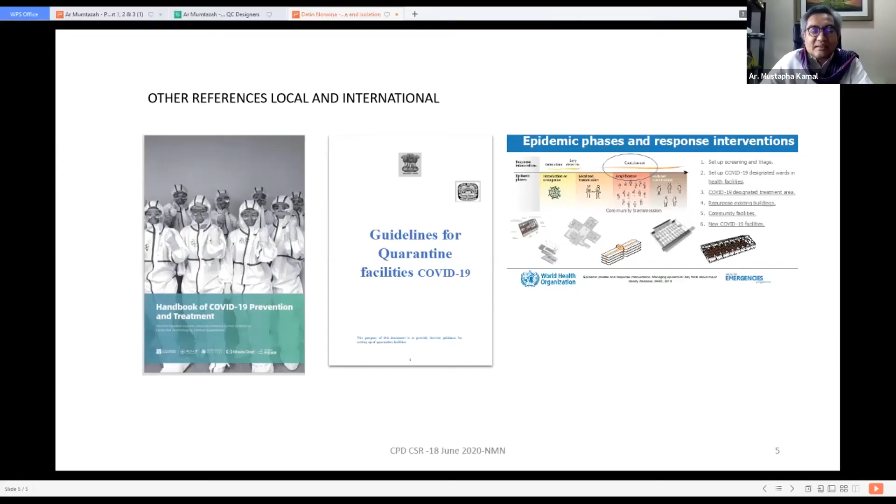Thank you very much, Datin. As a guide, we have completed the presentations of all the 7 proposals, and this is a summary. Can we have that summary slide, Salam? So this is actually from last week and also today. These are all the 7 proposals from the 7 groups. Last week there were 4, this week there's another 3. So these are the various forms, various reasonings and also various outcomes. So thank you very much, all speakers.

Now we would like to have our guests and also participants for the panel discussion. So again, please post your questions to the Q&A bar. I have 2 questions so far, and we can go straight to the question with the highest voting. I think this goes to either Engineer Yip or any of the architects. How does the airlock work in MITEC between patient cells? Is the patient cell air conditioned? If yes, is the air conditioning unit centralized or not? I think this one is better answered by Engineer Yip. You are the master designer there.

Please unmute. Okay, so basically, as Ms. Su Min has mentioned, the zoning basically has a clean zone and the exhibition hall is another zone. So our air conditioning is on a zoning basis, to have the differential pressure between the airlock side and the exhibition hall side, which is under negative pressure. What we normally do is keep the airflow in the clean zone on, and we minimize the return air back to the air handler. So we try to push the air towards the airlock and then into the quarantine zone in the exhibition hall. So the flow will be one direction.